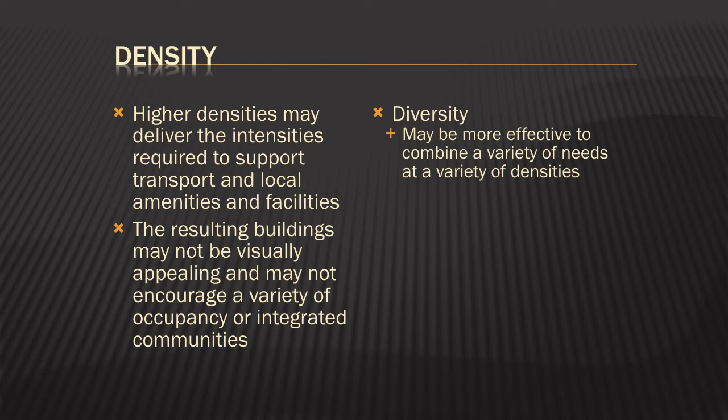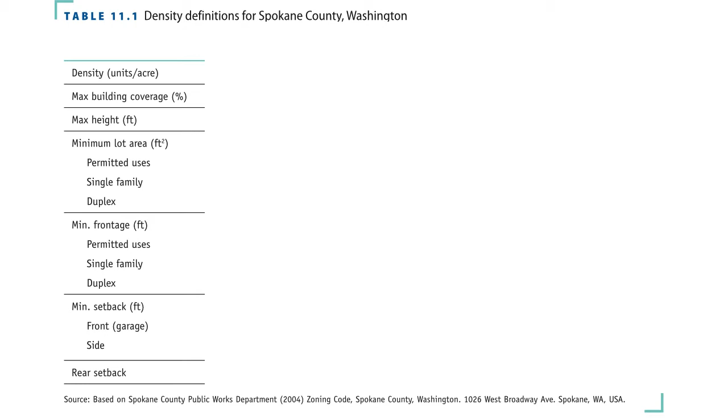With respect to residential areas, zoning laws also define housing density, which specifies the number and type of dwellings allowed, typically per acre of proposed residential space. Residential housing density has some commonly classified definitions, such as low-density residential, typically ranging from 1 to 6 single or two-family housing units per acre. Medium-density residential, typically from 6 to 15 single and multifamily units per acre. A multifamily unit would be a duplex or apartment building.

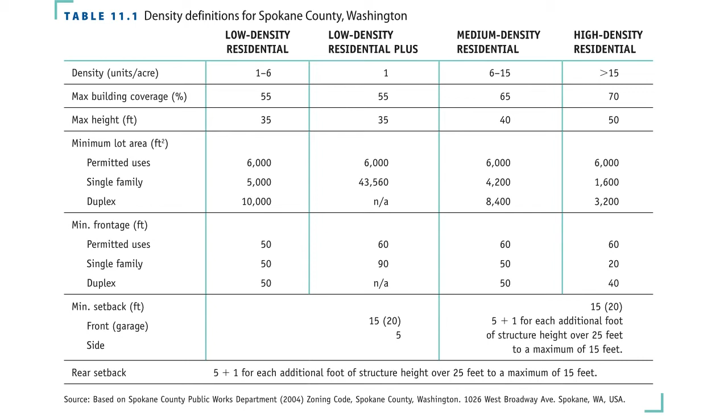High-density residential usually reflects large multifamily structures like apartment complexes and usually has a density of more than 15 units per acre. Zoning provisions can affect the sustainability of the built environment by influencing the land area required for construction and also the amount of building material needed to comply with the zoning regulations. For example, the zoning provisions discussed above, housing density, the requirements for open space specified in Table 11.2, and single-use zoning all contribute to less compact, more spread out developments.

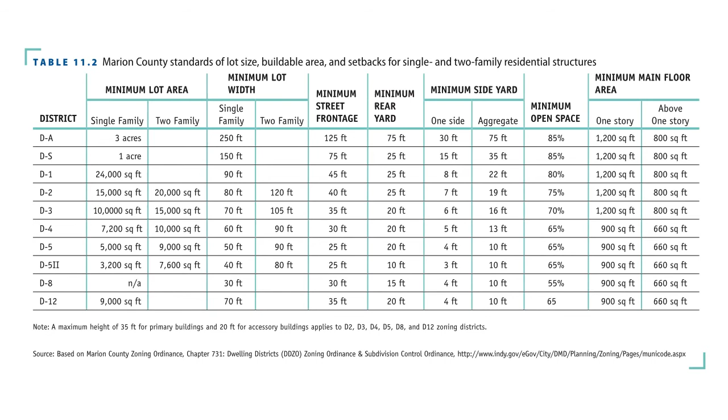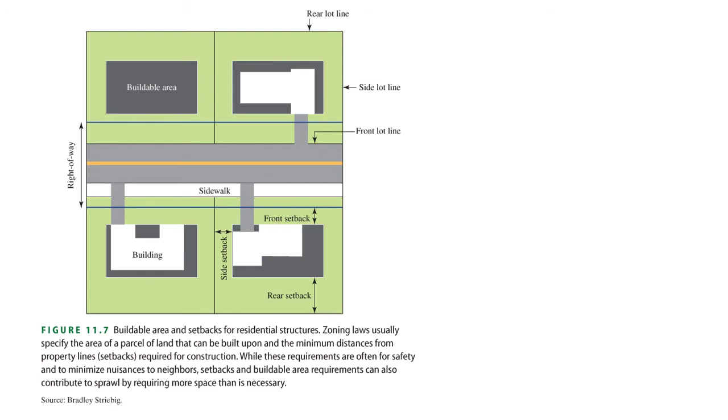Other zoning provisions that can affect sustainable land use practices include requirements for the building envelope, setback, and angle of bulk plane, and also the floor area ratios. It's typical in the United States to have a required distance, called a setback, between a structure and an adjacent feature, such as a property line, street, another structure, or a stream. Figure 11.7 also illustrates setback requirements for residential dwellings. As seen in this image, the building structure must be completely within the buildable area, or building envelope, established by the setback distances and the size of the right-of-way.

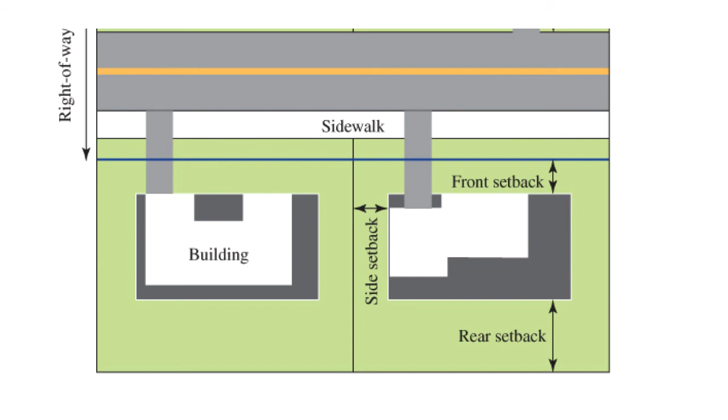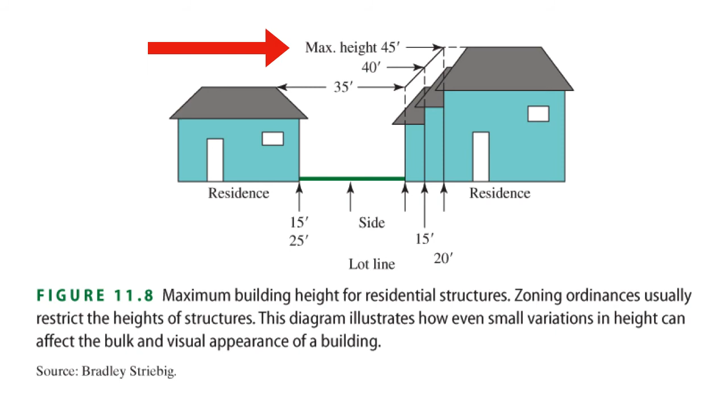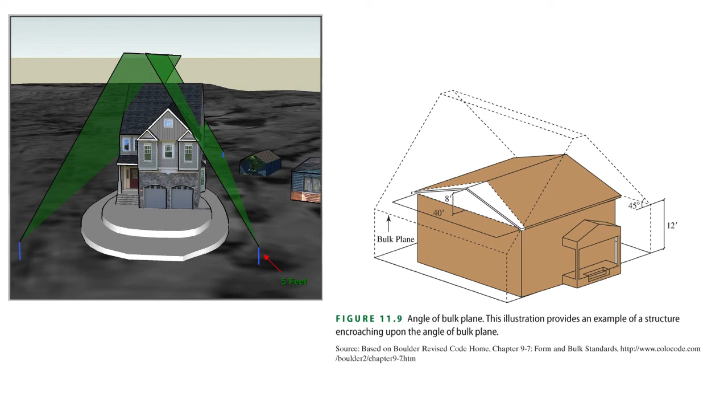As with single-use zoning, U.S. residential setback requirements have also been criticized for contributing to urban sprawl because they encourage larger lot sizes and lower density development. Zoning ordinances can also specify a maximum building height and may define the angle of bulk plane in an attempt to prevent buildings from literally overshadowing smaller neighboring structures. The angle of bulk plane is typically determined by calculating the angle from the edge of the lot to be developed to the steepest angle of the proposed building, as illustrated in Figure 11.9. Depending on permitted building heights and angle of bulk plane requirements, zoning laws can also result in lower density residential areas.

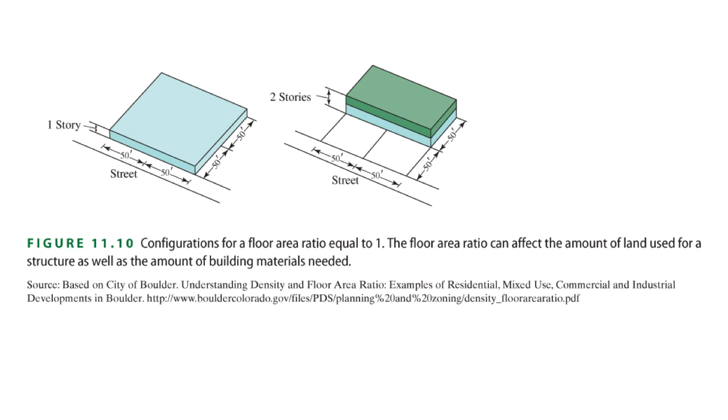Zoning codes may also specify other key building parameters such as the floor area ratio. The floor area ratio is the ratio of the building's footprint floor area to the area of the lot on which the building is to be constructed. Building cannot exceed the specified floor area ratio, although multiple building configurations are possible. An example of 3 methods to comply with an FAR equal to 1 is illustrated in Figure 11.10. Note that requirements for the floor area ratio will have an impact on the amount of building material required to construct a building.

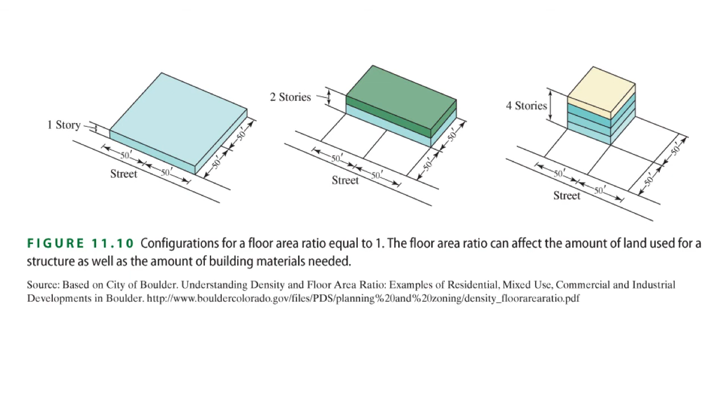In summary, land use, zoning designations, and ordinances define the basic manner in which land can be used for the built environment, and their provisions can affect sustainable land use in important ways. Permitted uses, housing density, building envelopes, setbacks, widths of right-of-way, open space requirements, floor area ratios, angle of bulk plane, and many other specifications are necessary regulations for safety, convenience, and pleasing spaces. But individually and collectively, these factors can affect the location and arrangement of our structures, which ultimately affects land cover and its environmental benefits.